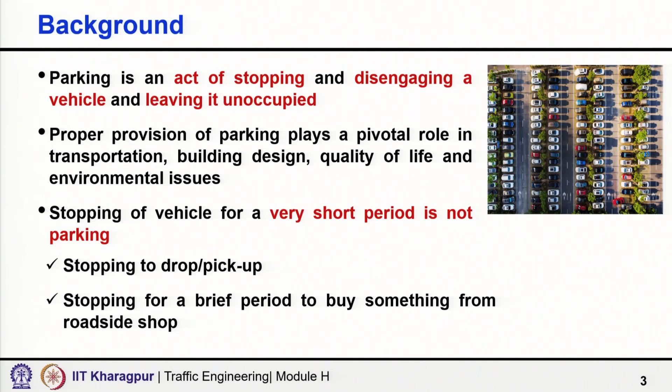What is parking? Parking is an act of stopping and disengaging a vehicle and leaving it unoccupied. Please carefully note that we are talking about the act of stopping. So, stopping a vehicle. Second, disengaging a vehicle. Third, leaving it unoccupied.

That means, if you are stopping the vehicle for a short period just for the purpose of pick up or drop off, or just stop to buy something from a roadside shop, those are not really called parking. So, there is a difference between stopping and parking. It is only called parking when there is an act of stopping, disengaging a vehicle and also leaving it unoccupied.

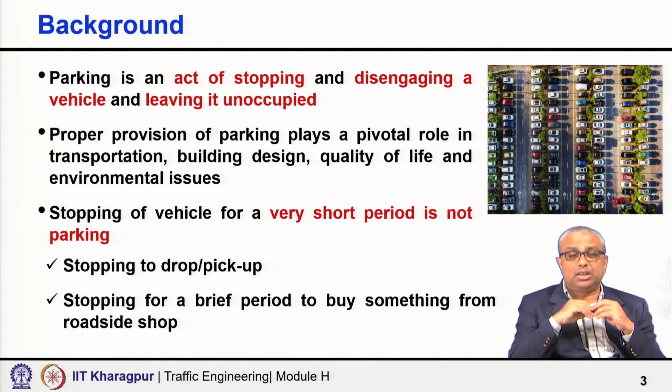Proper provision of parking plays a pivotal role in transportation, design of buildings, multi-story specifically, quality of life and also addressing the environmental issues, which are very prominent and very important in the context of urban transport, especially in developing countries such as India.

Why we need parking management? There are multiple reasons. The first, for doing proper congestion management. As you know, most of our Indian cities are not developed as planned cities and the road space allocated for development of roads is not adequate. So, that percentage of road space is on a lower side.

Moreover, the urban population is growing, overall urban traffic is growing, and there are increasingly higher aspirations of owning private vehicles. So, limited road space and the growth of transport demand, particularly growth of private vehicles, are creating imbalance, and this imbalance between demand and supply is aggravating congestion. So, how to do better congestion management in urban areas is really a big challenge to traffic engineers.

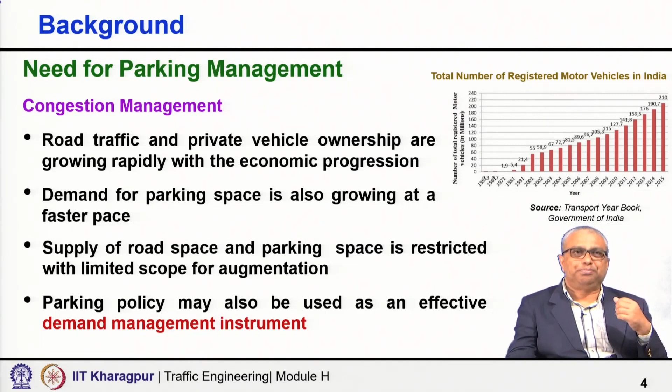Then improper parking may also lead to road crashes. In the Indian context, road safety is a major concern. We have so many road crashes, so many fatalities. If you do not allocate proper parking space, if you do not design the parking properly, the kind of maneuvers required may cause more crashes in urban areas. So, if we do proper parking management, we can also reduce the number of crashes.

Then vehicles parked in an improper manner may also cause obstruction to roadside fire hydrants. You may just park your vehicle in front of a fire hydrant when there is no control on parking, or when proper parking management is absent in an urban area. This may create obstruction, because in case of any fire breakout, the firefighting authority would not be able to access the fire hydrants.

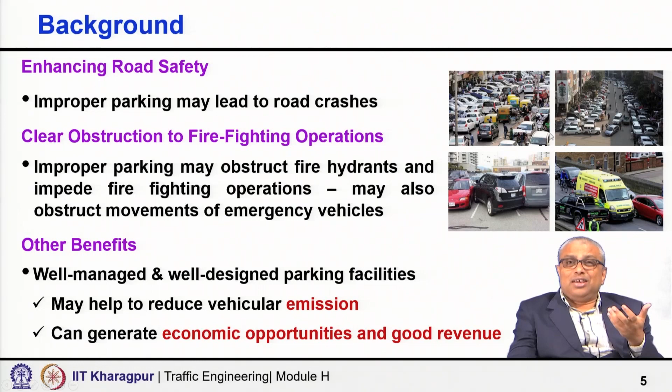Then going to the types of parking, there are two types of parking broadly. One we can call on-street parking, the other is called off-street parking. Road users always prefer on-street parking. What is on-street parking? Here the area allotted for parking is located at the side of the road. I have shown some photographs here, you can see, by the side of the road. So, typically part of the carriageway and the shoulder together is used for parking of vehicles by the side of the road.

It is very easy because you just simply park the vehicle there by the roadside, and easily you can take out your vehicle as well. You can go to the parking and take out the vehicle very easily, no extra travel. You want to park near a shop, you can simply go and park the vehicle near the shop if there is a space, of course, and that is what is easy. So, every road user or car user always prefers on-street parking.

And so, what is on-street parking? Two characteristics. First, parking is done using part of the carriageway and shoulder. Second, such parking places do not have a definite entry or exit. The vehicle is just parked by the side of the road. There is no definite entry or exit that you have to use, which is normally there for off-street parking. So, that is a major point to be noted for on-street parking.

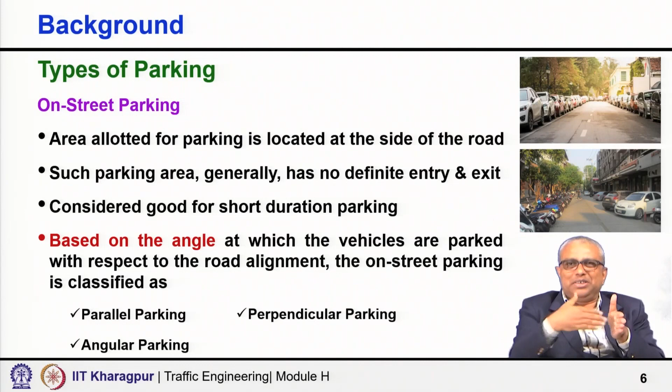If you are going for angular parking, so 30 degree, 45 degree, 60 degree, you can increase the number of vehicles that can be parked, but you are occupying more road space. Perpendicular parking is at an angle of 90 degrees. So, if the vehicles are moving like this, the parked vehicles are placed like this at an angle of 90 degrees. A little bit of description of that we will have.

But let us see what are the advantages of on-street parking. As I said, on-street parking acts as a safety barrier for pedestrians. You can see when the vehicles are parked and beyond that pedestrians are walking. So, even if a moving vehicle is out of control, it will not directly go and hit the pedestrians and vulnerable road users who are walking by the side of the road. So, it acts something like a safety barrier for pedestrians who are using the footpath.

It also helps to reduce the speed of the traffic stream, thus enhancing safety of the non-motorized modes. You cannot travel so fast, because the parking will reduce the capacity. So, the congestion will be higher, there will be less freedom of movement for the moving vehicle. So, naturally speed will come down. So, in some areas like residential areas and busy areas, we actually want traffic calming. That means we do not want the traffic to move very fast. So, that can be achieved, and once the traffic speed is less, it is good for non-motorized transport, NMT, for pedestrians, for bicyclists who are even crossing the road.

Then lesser investment is required as compared to an off-street parking facility. If you want to develop a multi-storied off-street parking facility, you need a different area, a space, you need to invest in development, construction, maintenance, operation. Here nothing is required. So, lesser investment as compared to an off-street parking facility.

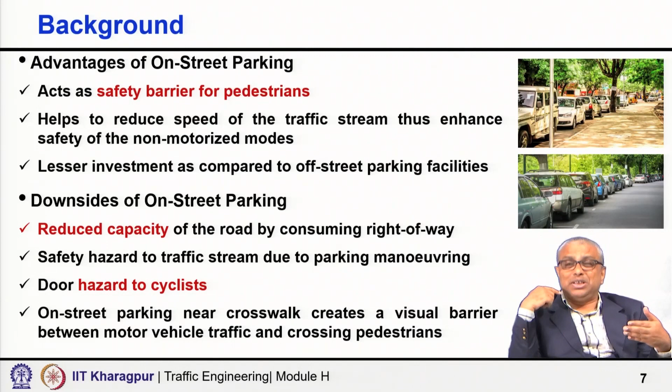Sometimes you may mistakenly open the door in a wrong way, and it may also cause a road crash. So, door hazards to cyclists. Also, on-street parking near a crosswalk creates a visual barrier between motor traffic and the crossing pedestrian. It may block the line of sight. Sometimes an approaching vehicle may not be able to notice that a pedestrian is trying to cross. Similarly, the pedestrian while crossing may not be able to see that there is a vehicle approaching.

Now, off-street facilities on the other hand will overcome the disadvantages of on-street facilities. These are basically surface parking lots and car park structures. It could be underground or also elevated. You may have a multi-storied car parking space, or it may be underground parking as well. In many areas, like the CBD area, the underground is used for parking.

These are often located at some distance from the main traffic stream on the road, because you need a proper place. Not on every road will you be able to develop an off-street facility. So, you need a space. So, it is often at a distance from the main traffic stream, and where you actually want to go, it may not be just next to or near that building, maybe a little bit away from that.

Access to these facilities can be for either public or private use. They can also be managed by the municipality, sometimes a corporation, or by private or sometimes semi-private enterprises. It all depends on what structure and what procedure the city is following.

The area allocated for parking has a definite entry and exit. This is one major difference between on-street and off-street. Off-street will always have a definite entry and a definite exit. It may be the same point for entry and exit, or it may be different, but a definite entry and exit. If you want to enter, you have to enter through some points or locations. If you want to exit, you have to exit through some locations. It is normally considered good for long-duration parking.

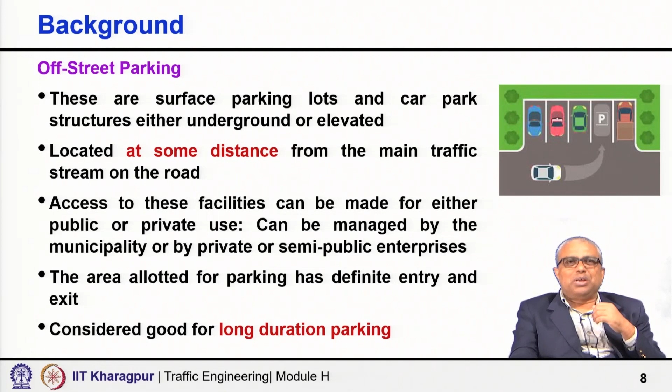So, there are advantages of off-street parking, and there are also downsides. The advantages include that the roads are free for the traffic stream; you give maximum capacity for the movement of vehicles. So, road capacity can be utilized in a better way for the moving traffic stream.

You can get high capacity and higher safety to vehicles, but the downside may include higher access and egress time, and people may not be interested in some cases, because they may dislike it because of the walking distance to and from the off-street facility.

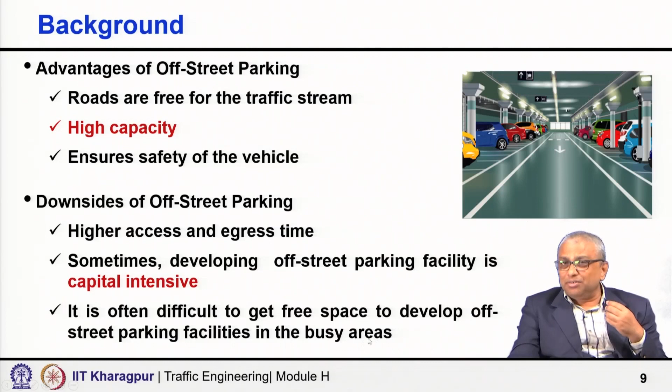Sometimes developing an off-street facility is capital intensive. If you want this kind of high-end off-street parking facility, an underground facility, or even a multi-storied facility, it is capital intensive. It is often difficult to even get free space for development of a parking facility in the busy areas.

So, with this background, let us now try to understand what are the key questions that we often face and need to answer as a traffic engineer. First, what is the demand for parking? How much is the real demand? Just keep a typical CBD area in mind and think. The first thing we want to know is what is the demand for parking? How many vehicles actually want to park?

Second, how much road space can be allocated for on-street parking, or what should be the supply of on-street parking? Okay, the demand is so much. Now, how much supply can we give? Looking at the places where parking cannot be done because of safety or other reasons, also looking at the traffic volume on the road, available carriageway width and so on, what could be my rational supply on street,

where I can allow parking, what kind of parking arrangement is possible, how much length of the kerb is actually available for parking. Considering all this, we understand how much supply is possible.

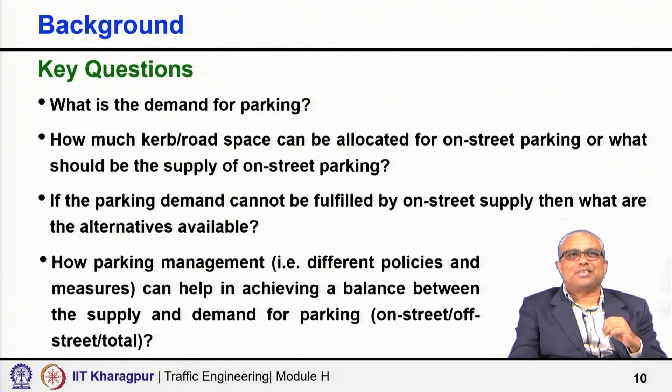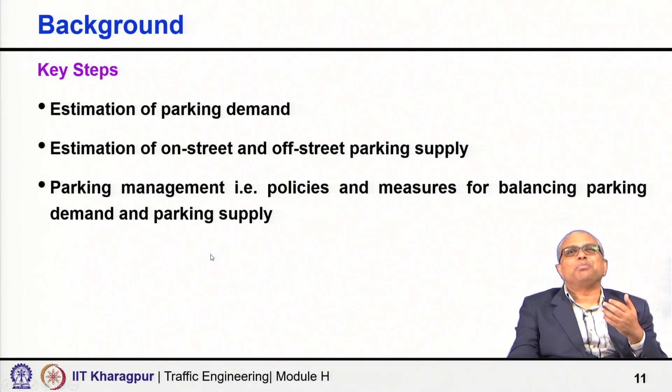Now, to answer these key questions, there are certain key steps. First, estimation of parking demand. Second, estimation of on-street and off-street parking supply. Third, parking management, that is, policies and measures for balancing parking demand and supply. So, now we go stepwise. First, estimation of parking demand. Parking surveys are conducted to collect data on availability of parking space, extent of its use, parking demand, parking fare and the effect of pricing policy on parking demand.

Parking demand may be estimated based on time, because there is a temporal variation of parking. On a road at 9 or 10 o'clock in the morning and 10 o'clock at night, the parking demand is not the same. So, parking demand varies over time. Weekday and weekend may also differ. Over a longer time frame, seasonally there could also be differences. In some festive season there may be very high demand, somewhere very low demand.

It could also be based on zoning of the study area, because of the spatial characteristics of parking demand. For example, if there is a big restaurant, then parking is required around that place. If there is a CBD area with big buildings and offices, people want to park their vehicle around there, not 2 or 3 kilometers away. So, parking demand is temporal and also spatial, and we can measure it considering the temporal variation, the spatial variation, or both.

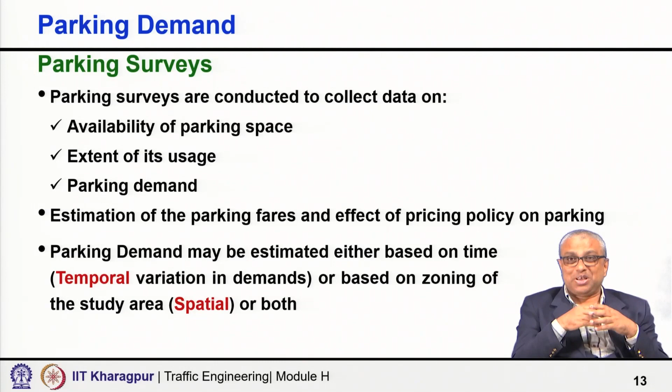Deciding when to survey. Now, this activity varies from day to day, season to season, different hours of the day. So, it is important to ensure an unbiased and representative sample. What I am measuring from the field, is it really representative of the situation I am trying to analyze? So, the survey must be repeated for a representative number of days or periods, but often you may not be able to do such a thing because of limited resources and time. We cannot keep on doing surveys for a longer period, right.

On multiple days we are only counting, because often the resources will be limited, financial resources and time resources both will be limited. So, ideally with limited resources, surveys should be carried out during a preferred time on 1 or 2 days, which are more likely to replicate a measure of what is required to be understood. What is required to be understood? We are actually collecting data for a limited time period, but during those time periods which replicate that situation, what is required to be understood. Right. So, this is very important, which are more likely to replicate a measure of what is required to be understood.

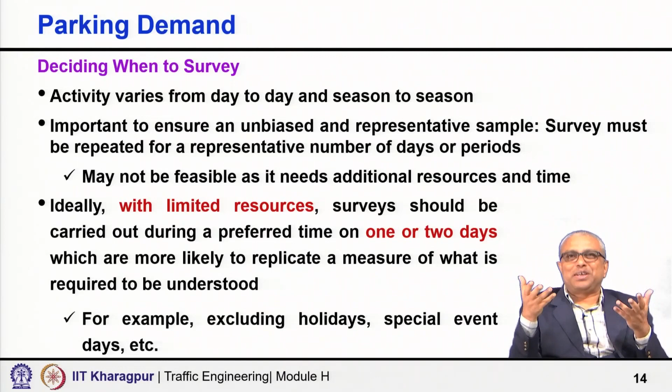Supply surveys: sensible estimates of available parking are necessary to understand the existing parking behavior, how much is the demand, what is the duration of parking, and also the potential for accommodating additional parking. We also want to see, if we can do the supply survey, how much is the demand now and whether there is any scope to accommodate even more.

In a controlled parking area, where there is already some reasonable level of control on parking, on-street parking bays are supposed to be explicitly marked, not in all cases in India, or the length of the street with on-street parking is known. So, if you know the length, if you know the arrangement for parking, you know how much length each parked vehicle will consume. So, you can get the number of vehicles easily, and if the bays are explicitly marked, then it is easy again for you to get a count. In case of off-street land or structure, off-street parking bays are also often marked and therefore can be counted explicitly. Off-street parking bays are more or less everywhere marked.

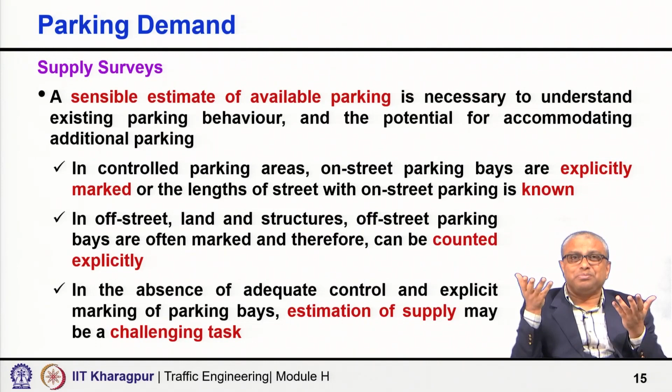So, you can get a count, but the real problem comes when you do not have adequate control, which is the situation maybe in the majority of Indian urban areas, and where explicit marking of parking bays is absent. Often you will find, okay, on this road parking is allowed, but parking bays are not marked, and look at the way the vehicles are parked. It is very unsafe and it is really irritating in a way. Unsafe, inconvenient, but that is the way it is going on. Nobody has any control, the authority does not have any control. So, in those cases estimation of supply may be a challenging task.

There are two types of surveys we will discuss today, or maybe three types of survey. One is the occupancy survey. Here the number of vehicles parked on street are periodically counted to record the total number of vehicles in an area, or on a street, also by each vehicle type on each street. Simple, maybe we decide that we will do the parking occupancy survey from 8 o'clock in the morning to 8 o'clock in the evening, and every hour we will count the number of vehicles parked.

So, we will simply travel from A to B and B to A separately. Considering A to B, when I am travelling as per Indian convention, I will count the number of vehicles which are parked on the left side, and again when I travel B to A, I will consider the number of vehicles which are parked on the left side.

So, street-wise, every hour we count how many vehicles are parked, and also record the number vehicle category-wise. Like that, different roads in a parking zone, like the traffic analysis zone, a parking analysis zone, can be combined together. We can say this is the overall parking zone demand, and all zones together, the whole urban area or the whole CBD area or the area under study, give the total parking.

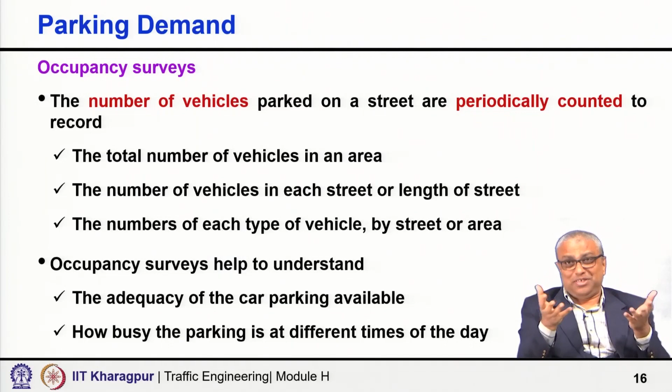And such occupancy surveys are very helpful, because we can understand the adequacy of the car parking available, and how busy the parking is at different times of the day, because it will show you how the parking demand is changing during different hours of the day on each street, in every zone and the whole study area as a whole.

The primary advantages are that this kind of survey is used appropriately where the data is being collected to give a broad understanding of the adequacy of parking supply, whether my parking supply is adequate, or you see which way they are parked also. Sometimes they may be parked in an organized manner as per the safety norms. Sometimes you may find they are parked in the intersection area, near the bus stop, double parking, the pedestrian pathway is encroached.

So, you know what the problems are, and whether the parking supply is adequate or not compared to the demand. Or, most importantly, the real strength of the occupancy survey is understanding the changes in demand over time. I have the demand data every hour, so I know throughout the day, from morning 8 o'clock to evening 8 o'clock, how the demand is varying.

Another great advantage is it allows a large amount of parking to be surveyed quickly, and so requires fewer survey resources. Every hour you are taking one count, so one person can actually cover a good length of road in one round. Maybe in 30-40 minutes the person will walk along several streets and come back to the original point, just creating a loop.

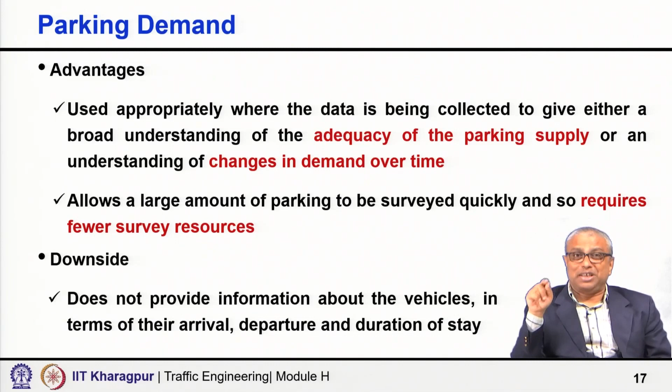The downside is the parking occupancy survey does not provide information about when the vehicle arrived, when the departure is happening, and what the duration of stay is. Such data is not there, because I may observe a vehicle at 9 o'clock and at 10 o'clock, but I am not checking whether it is the same vehicle or a different vehicle. I only know the demand, but not much more about arrival, departure and duration of stay.

The next is the beat survey. Beat surveys provide more detailed information about the parking behavior of individual vehicles, and hence an aggregate picture of the parking behavior, not just the gross level of parking demand, something beyond that. That is why we do the beat survey.

Specifically, we can select a few specific, representative segments where the parking lots are either marked, or even if not marked, you know a certain type of parking is happening, maybe parallel, at a specific angle, or perpendicular. At certain intervals, we go and note down the registration number. So, every half an hour maybe I am taking a beat, and I will record the registration numbers of vehicles which are parked there.

Then, matching the registration number, you can know the approximate duration of parking every vehicle has done. And then you observe so many vehicles during the day throughout this study period. So you can get a distribution, say among the vehicles what percentage is parking up to 1 hour, what percentage is parking from 1 hour to 2 hours, then 2 hours to 3 hours, and so on and so forth.

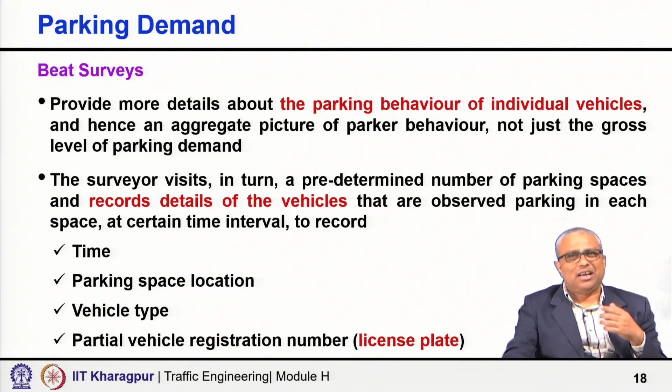Generally a beat survey is undertaken at regular intervals that we call beats, and the time is recorded at an appropriate time block. You can call it beat frequency, which is determined by the purpose of the survey. You may do 1 beat every 15 minutes, or every 30 minutes, or 1 hour. It depends on your objective and how much accuracy is expected, and so on.

Beat surveys are used to understand the pattern of arrival and departure, and of course, the main thing is the duration of stay. What is the nature of parking, short term or long term, that is important. So it is used to distinguish between long term and short term parking activity, and frequency must be higher to identify short term parking. It is useful for both on-street and off-street surveys. In both cases you can do that.

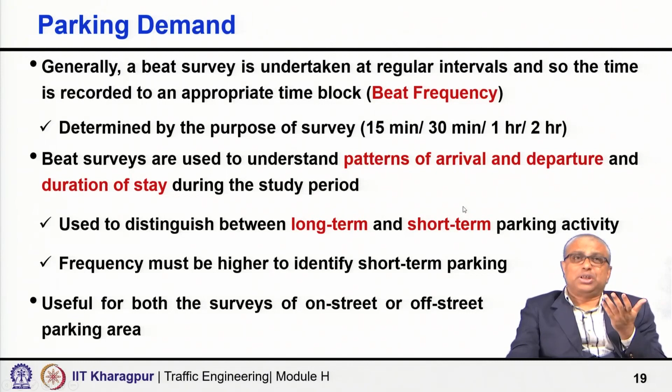Time accuracy is an issue, because an observer does not know exactly when a vehicle has arrived. All he knows is it arrived after his last visit and before the present one, because during the last beat that vehicle was not observed. So all the surveyor knows is last time the vehicle was not here and now it is here. It came sometime in between; he does not know the exact time, but the higher the beat frequency, the lower the error.

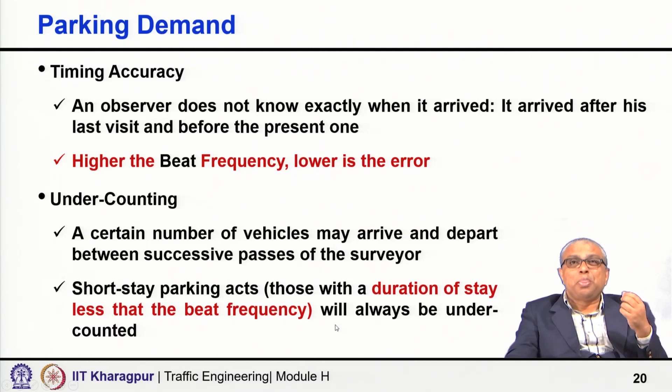If instead of 1 hour or 30 minutes we do a 15-minute beat, our accuracy will be better. Also undercounting may happen, because if you are doing it every half an hour, maybe in between one vehicle came and left. With a half-hour or 1-hour beat, such possibilities will be even higher. So short-stay parking acts, those with a duration of stay less than the beat interval, will always be undercounted. You have to decide how important such numbers are for you, and accordingly decide the beat frequency.

The last is the continuous observation technique. It is very suitable for off-street facilities, where there is a definite entry and a definite exit. As the vehicle is entering or exiting, you record the registration number and the time. So for the same registration number, you know the exact in time and out time, you can match them and know the exact duration of stay. So here it is not approximate, the exact time is known.

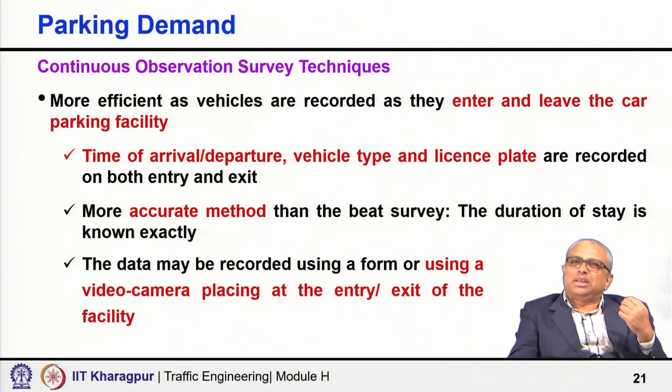It is more efficient, as vehicles are recorded as they enter or leave the car parking facility. The time of arrival, time of departure, vehicle type, and license plate are all recorded at both entry and exit, and this method is more accurate than the beat survey because the exact duration is known. The data may be recorded using a simple form with the registration number and time, or you can do a videographic survey and extract the vehicle registration number and time from it. So these are all different methods.

We shall continue our discussion in the next lecture. What we discussed today is the background: what parking is, why we need parking studies, the types of parking, the key questions we as traffic engineers are expected to face and answer, then the key steps, and then we started discussing parking demand. We only discussed parking surveys today, and we shall continue our discussion about parking demand and other aspects in the next class.